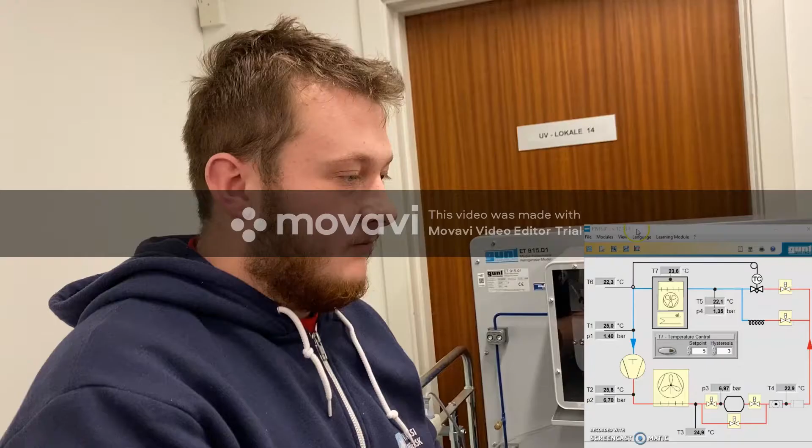Hello, and today we would like to present the refrigerant system on board Greek Pride. It's right here. We have our Gunt 915.01. We'll start off by naming all the big components, and then we will show you the smaller components later.

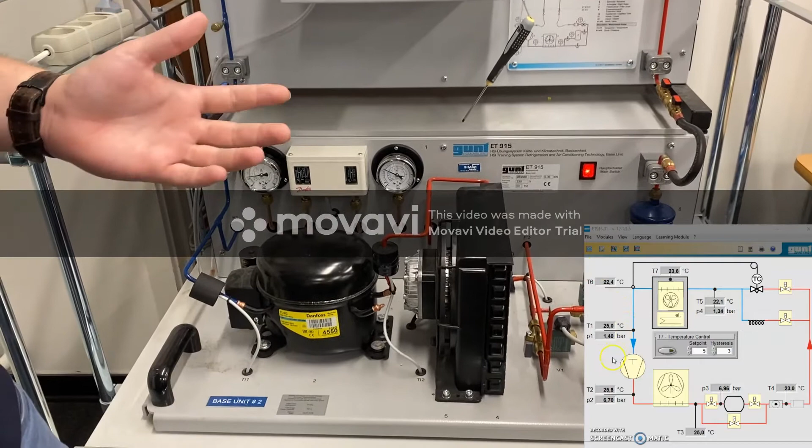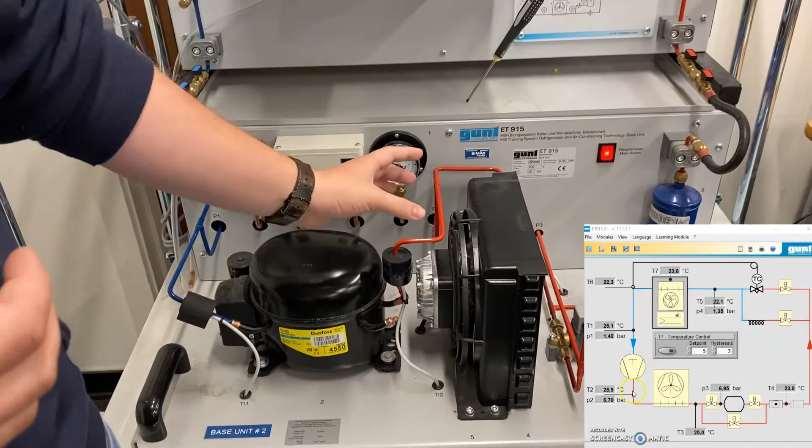We start at the compressor. This is what compresses the refrigerant. It's the component where we add energy to the system. Right after the compressor, we have the condenser. This is where we do a phase change from a gas in the compressor to a liquid after the condenser. Over here, we have our refrigerant receiver. This is where we store our refrigerant when the system is not in use.

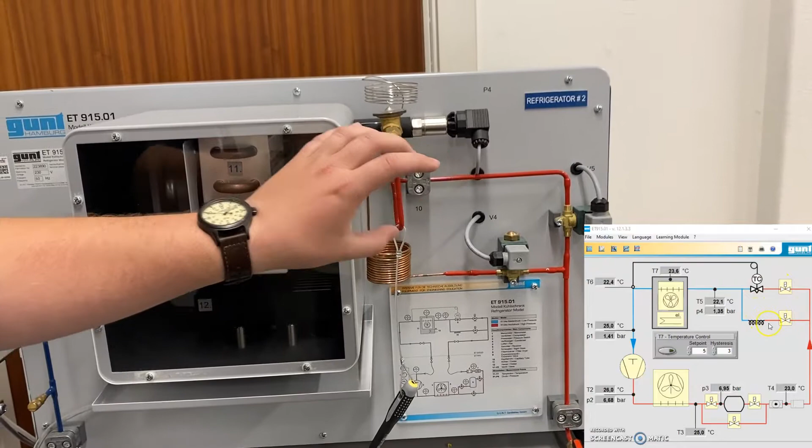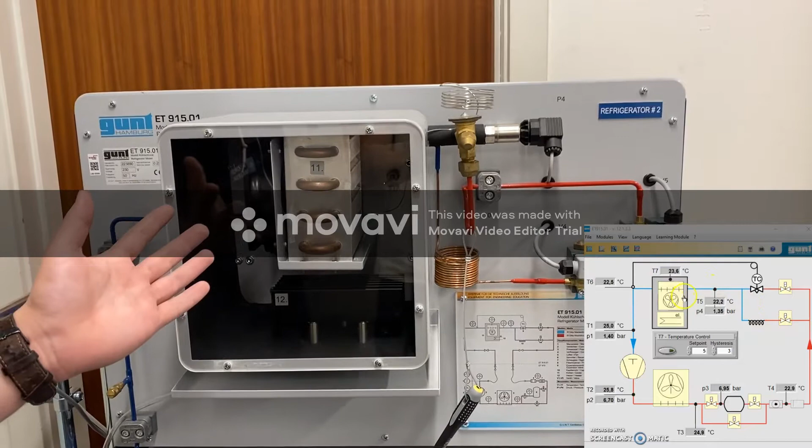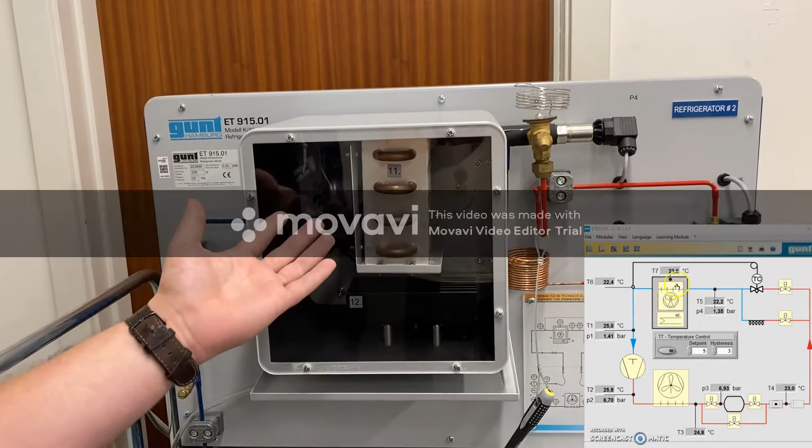And up here, we have our choke system, which is where we make the pressure difference that actually does the cooling of the refrigerant. After the choke, we have our evaporator, where we transfer the heat energy from the room to the refrigerant and take it back to the compressor. These were the four main components.

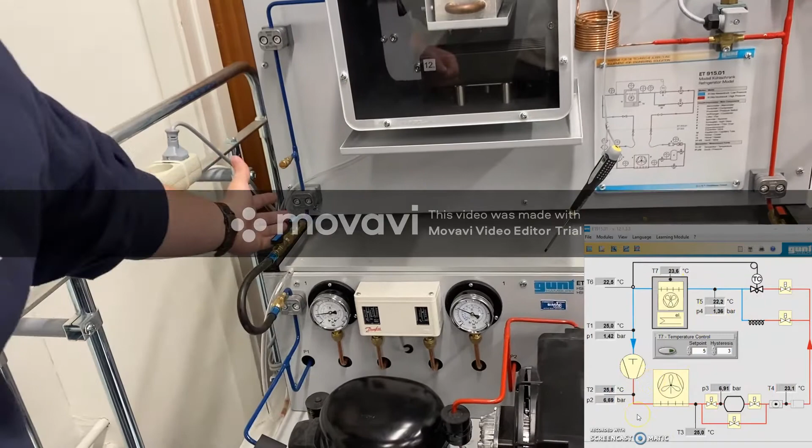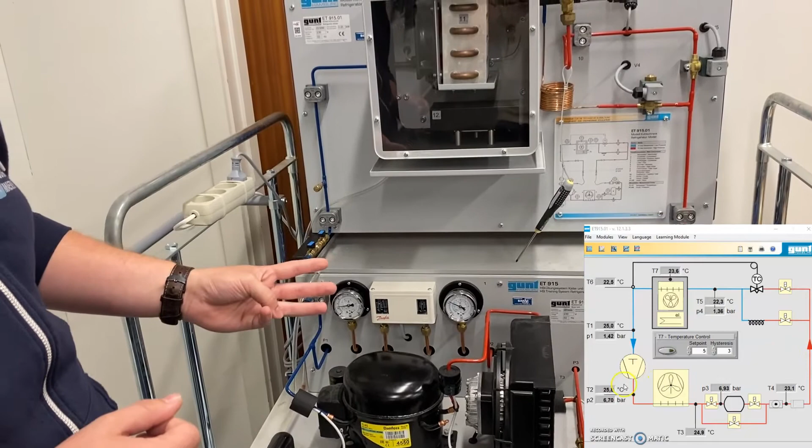Our system is split up into two parts. We have the bottom part here and the top part over here. The parts are separated by four isolation valves, two over here and two over here. We also have different places for temperature sensing and pressure indicators. We have some temperature indicators at the evaporator and around the compressor and the condenser. The same goes for pressure.

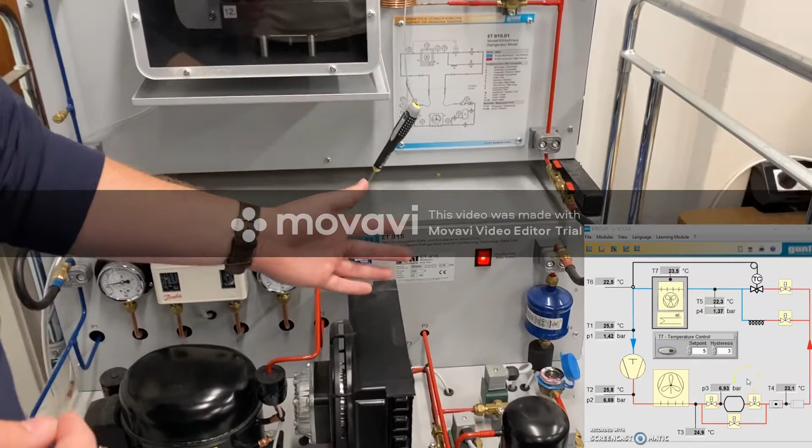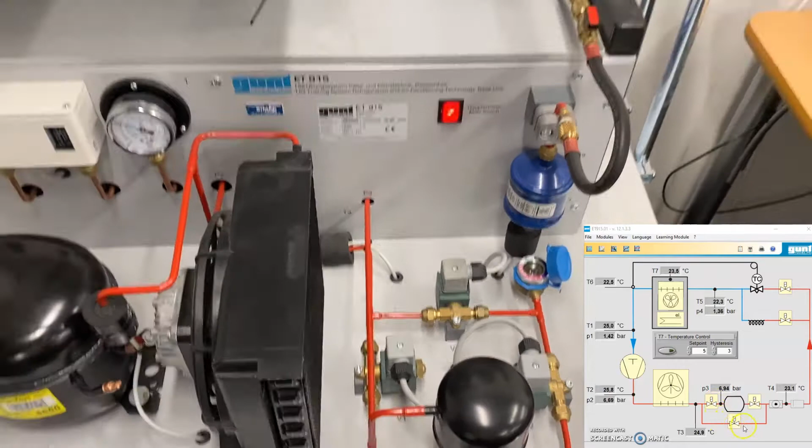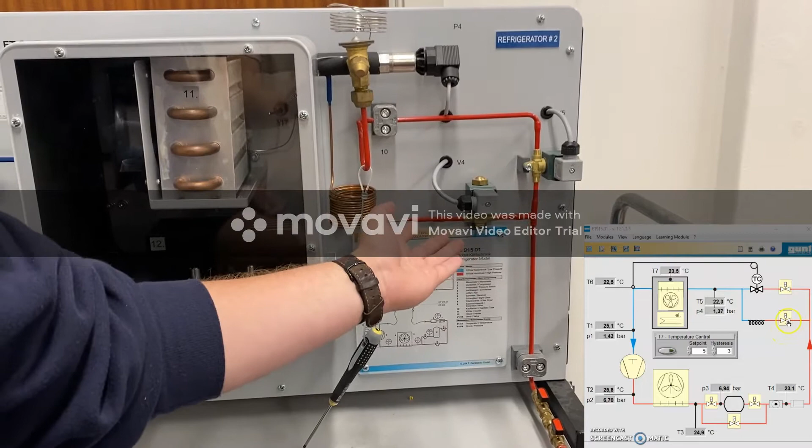Also for controlling the system, we have different solenoid valves. Down over here we have two solenoid valves going to the receiver, and also a bypass solenoid valve. Up at the top part for the choke valves, we have two different methods. We start at the bottom one, which is a max load choke valve. It goes straight into the capillary tube and into the evaporator.

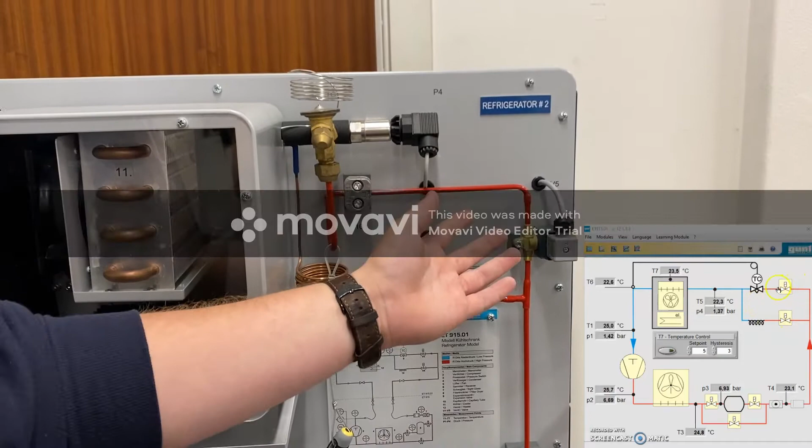We can also have some temperature control on the system instead, where we use the V5 solenoid valve, up into an expansion valve, which then controls the pressure at a set limit that we can set in the system.

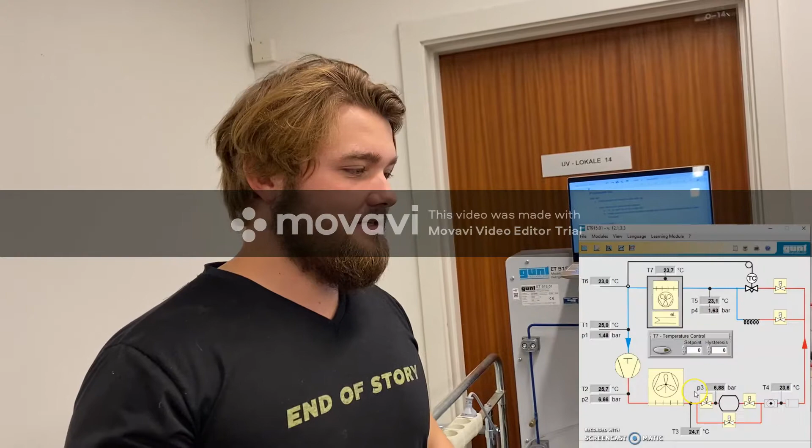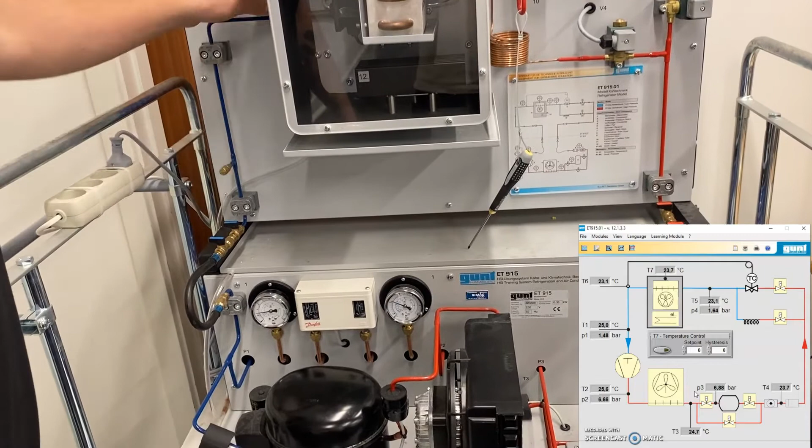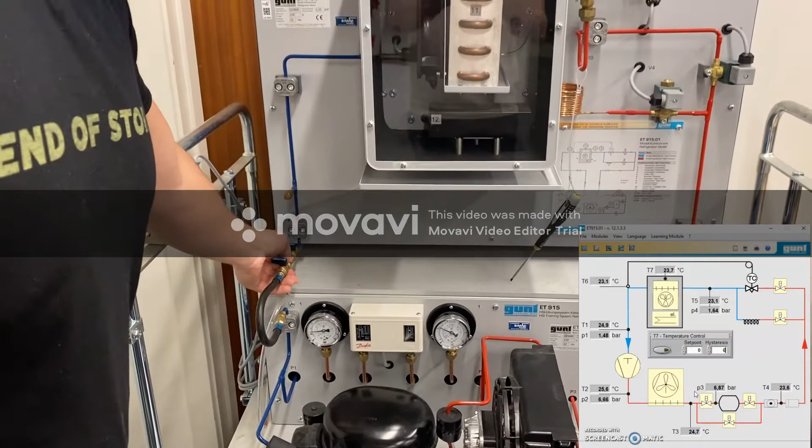Now we'll go through the startup procedure. We will start by checking the system for leaks. We will just touch the lines, and everywhere there is a connection we have to check for leaks and make sure everything is tight. Afterwards we will open the manual valves, and afterwards we can open valve number 1 and valve number 2 to make sure the refrigerant fills up the rest of the system.

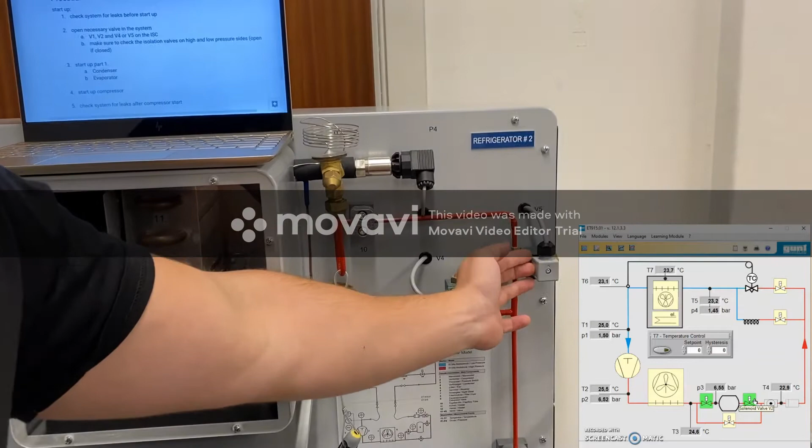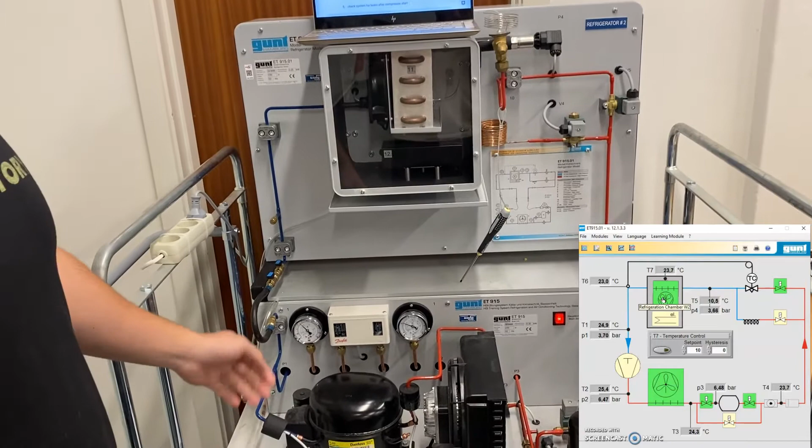And then afterwards we will go for valve 5 to make the temperature controlled choke valve. Here we will set it to 10 degrees. Afterwards we will start up the condenser and the evaporator. Now that those are running, we can make sure everything is open and ready to start the compressor. So we can start the compressor.

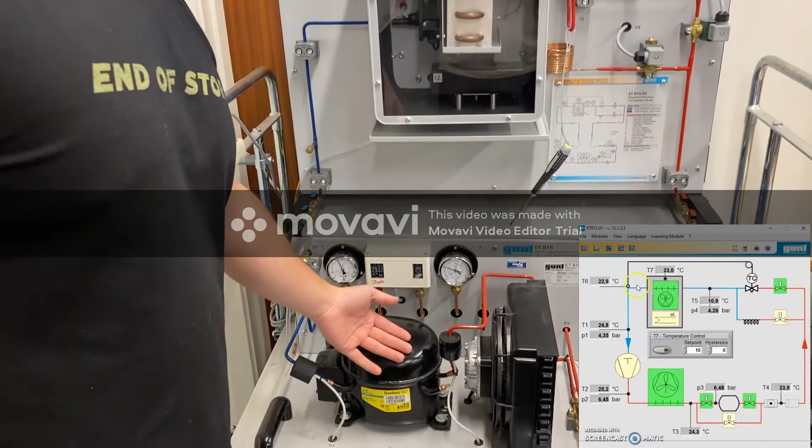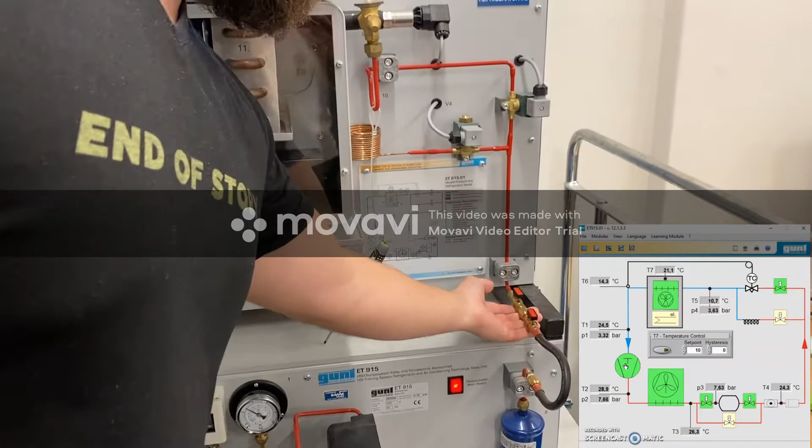And now we can hear that the compressor has started, and we can check again for any leaks, and if any leaks are shown, we will have to stop the system and make sure it's leak proof. Yes.

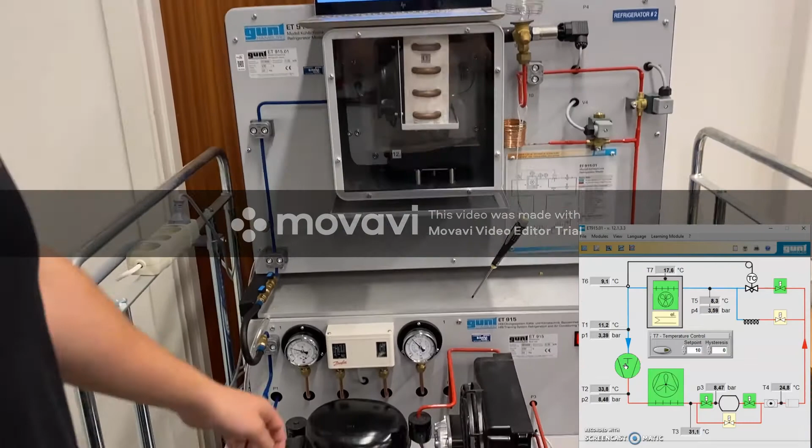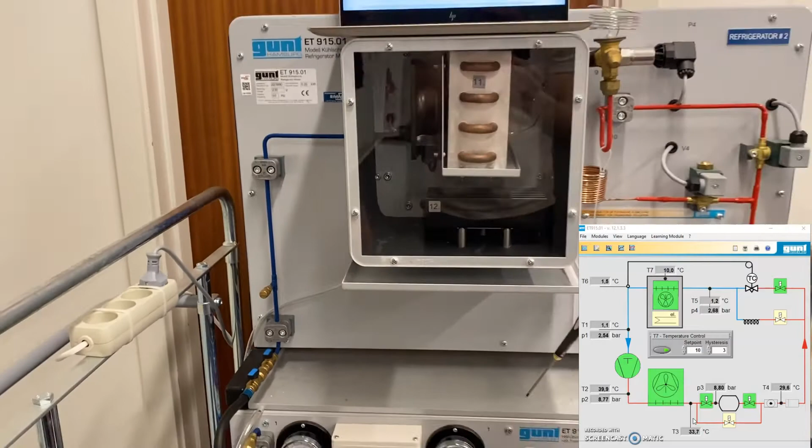And to make sure the system is running fine, there should be a difference in pressure over the compressor, and also in the application on the computer we can see the temperatures are different from each other, from the positive pressure side to the negative pressure side. Yes.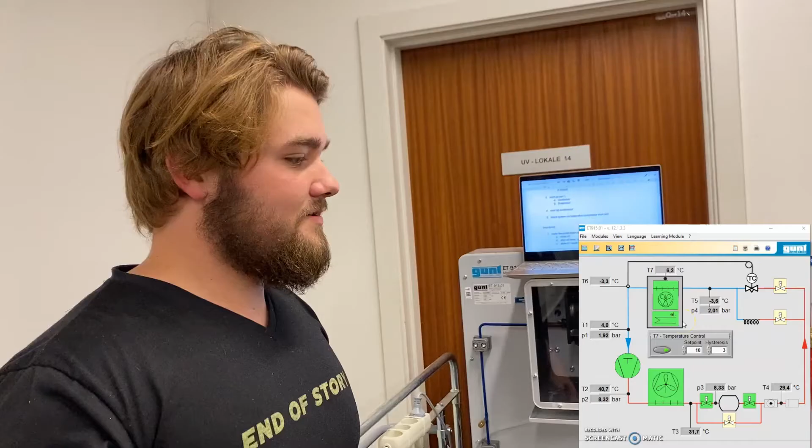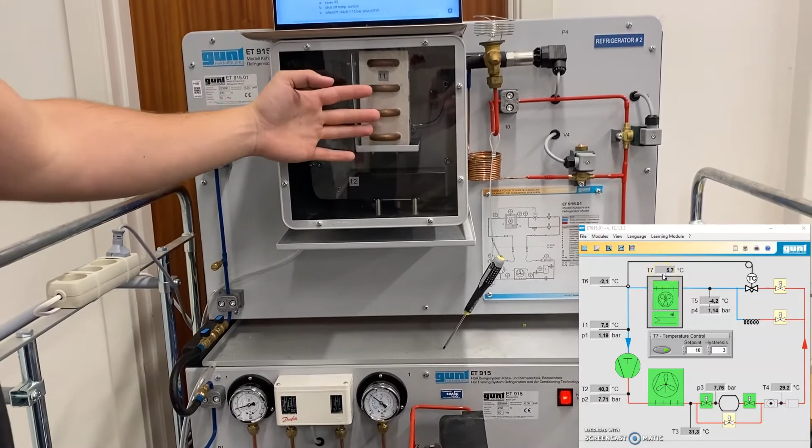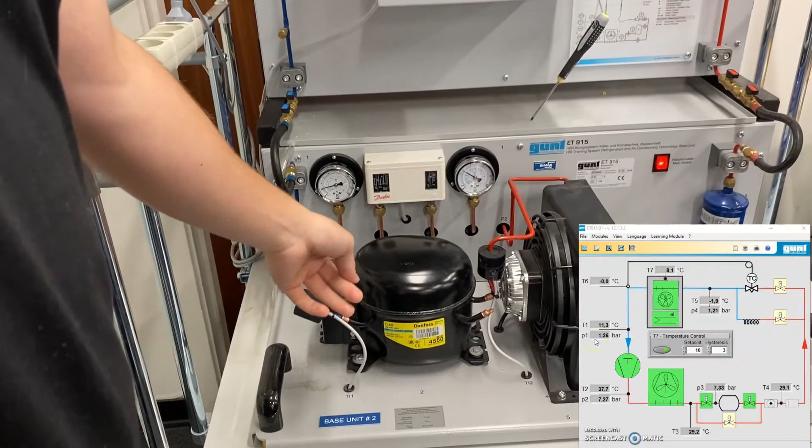Now we can see that valve number 5 has been shut off, and therefore no more refrigerant is flowing through the system. This means that we have reached the lowest point of this cooling box, and now we could also hear that the compressor stopped, and that means the low pressure side here is around 1.15 bars, because the compressor is not happy if it goes below 1 bar.

And the compressor will start again when this side reaches around 1.8 bar, and this valve will open if the temperature in this room goes up to 13 degrees. Yes.

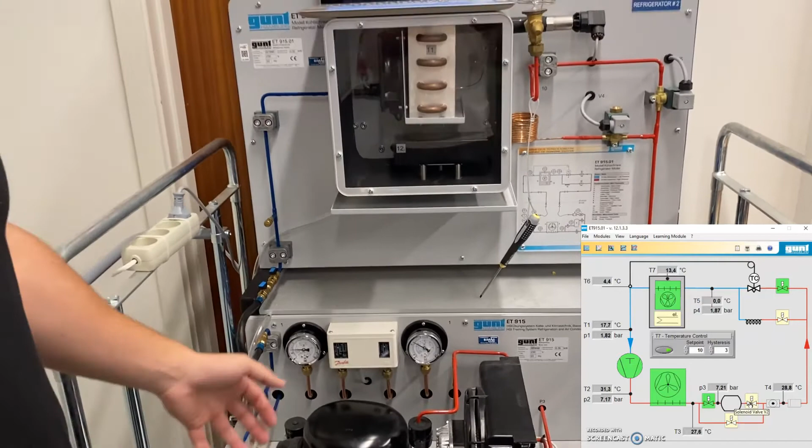Now we will go through the shutdown procedure and pump down. First of all, in the pump down, we will empty the system of refrigerant, and that we will do by first closing valve number 2. Then we will wait for the system to get all the refrigerant into the receiver, or as much as we can.

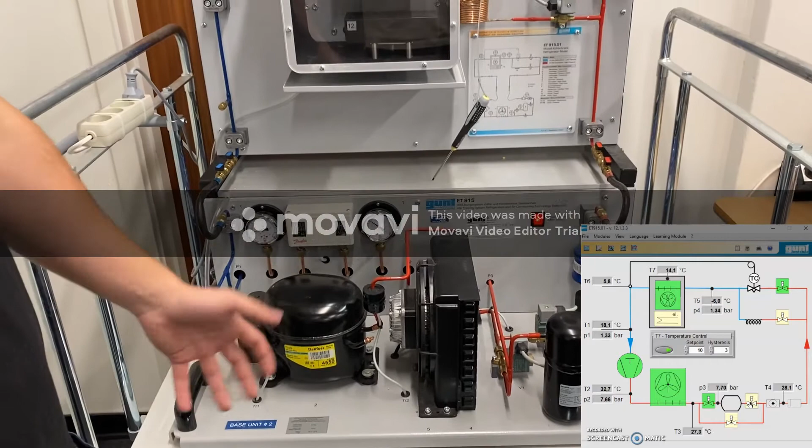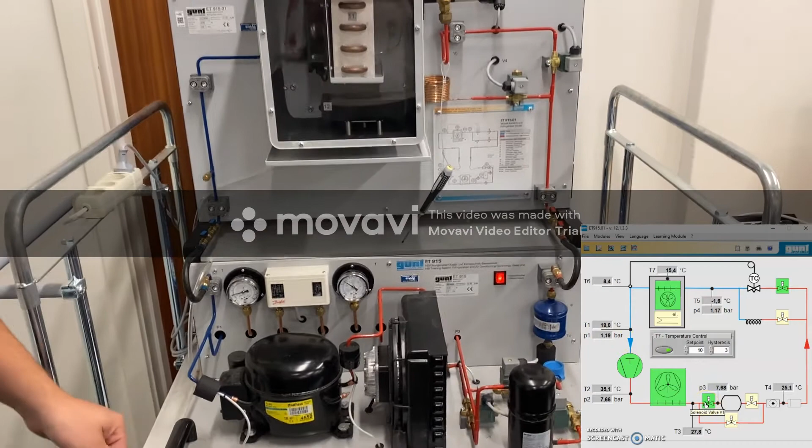And we will close valve number 1 when the compressor stops, and therefore this line goes down to 1.15 bars. Then we have collected as much as possible. So now we will just wait a little moment. And now we have collected as much as possible in this receiver.